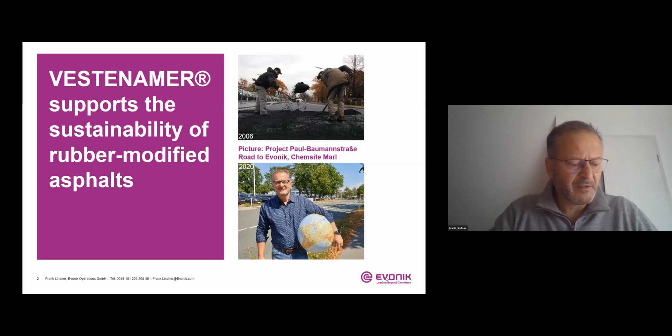Today, I would like to give you, first of all, a quick introduction into our targets. Then we'll come to our results of our lifetime prediction, our emission tests, as well as presenting a chance for CO2 reduction in road construction.

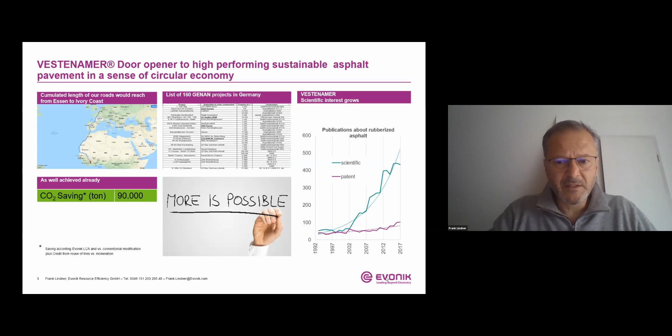Let's start with a quick overview about what is VESTENAMER in road construction. First of all, we are talking about a global business, but only in Germany alone we have already 160 projects in a list. We can do a calculation of already achieved CO2 savings as we have finished our life cycle assessment in 2020. And what we are very proud about as well is we see a growing scientific interest into our product and the solution of rubberized asphalt containing VESTENAMER.

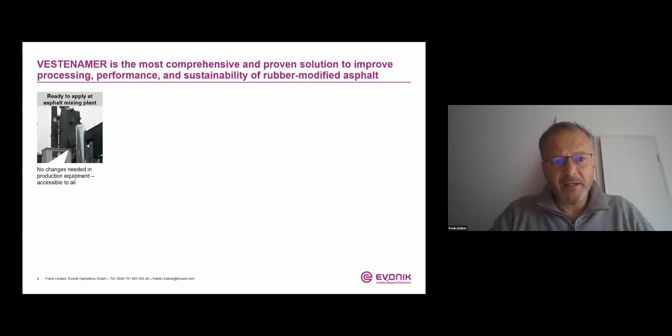We call VESTENAMER a most comprehensive and proven solution to improve processing performance and sustainability of rubber modified asphalt, which I would like to explain by some key aspects we are serving. First of all, our solution is ready to apply at any asphalt mixing plant with no changes in the equipment needed. You will observe that there's a very clean handling of rubberized asphalt possible when VESTENAMER is added. We serve also easier processing as our product is reducing the stickiness to metal, which is then giving you an easy manual handling of the material.

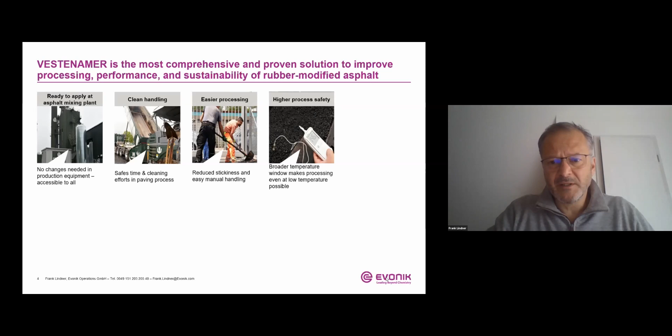There is a high process safety coming with the use of rubberized asphalt containing our product because the broader temperature window allows you even processing at lower temperature. We have observed in the field that 110 degrees centigrade is no problem in working with the material. And all this results in a very nice and easy way to have secure compaction and therefore best performance of your road pavements.

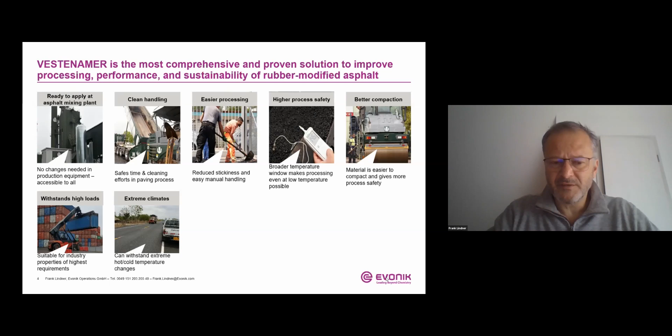Finally, our solution is ready for any of the asphalt pavements, even to the very extreme challenges of industry properties. For example, like this container property, as you can see on the picture. Climate is no issue for rubberized asphalt containing VESTENAMER. If it's really cold or if it's extremely hot, our asphalt solution can serve all the climates.

We're monitoring our projects. Some of them are now 16 years old. We can see that still nice performance is there. More about long-term or lifetime prediction would come at the end of the presentation.

So let's speak about another aspect, and that is a sustainable approach by the use of secondary raw materials. Together with our product, it's possible to enhance the use of recycling asphalt, and I will give you a slide at the end of the presentation as well, as there is the sustainable resource, the secondary resources itself, which gives you a very nice sustainable approach of asphalt paving in a sense of a circular economy.

And not to forget CO2 savings. We see a lot of potential in CO2 savings, which is available for the road construction industry, and I will give you some details later on.

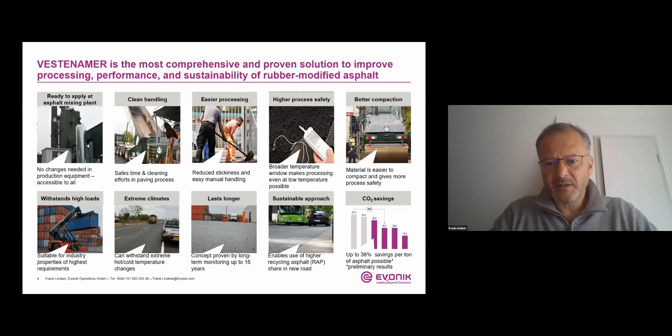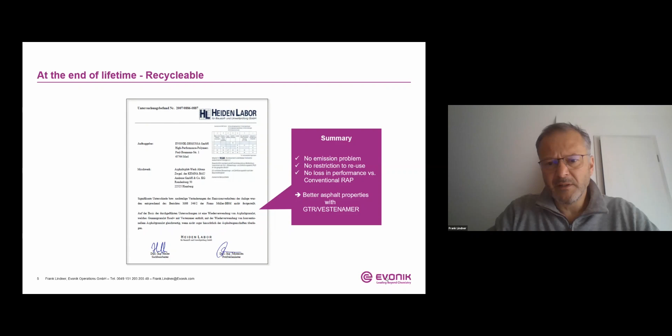Not to forget what happens at the end of a lifetime. So every pavement comes to a lifetime anytime. We tested that, and we can say that if we talk about the asphalt properties, or if we talk about the emissions while we would recycle rubberized asphalt with our product, there is no issue. There is no restriction in reusing the material.

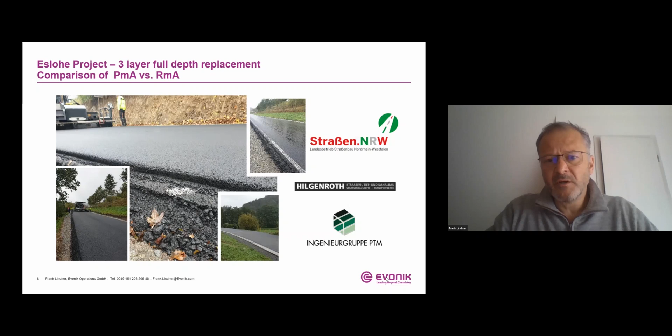What I would like to tell you, or what I would like to explain to you today as well, is about a project which we ran last year in October in association with our State Department of Transportation in our state in Germany. And that was about a full replacement of an asphalt package. All 3 layers had been replaced.

All material which we are testing are coming really from that commercial production. And most of the testings are based on the splitting tensile strength tests and the cooling test. And the cooling test I would like to present a little bit in detail.

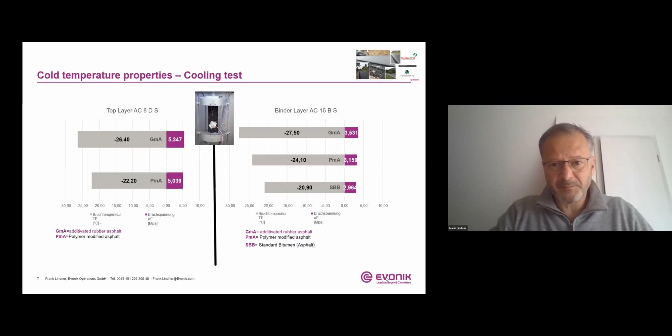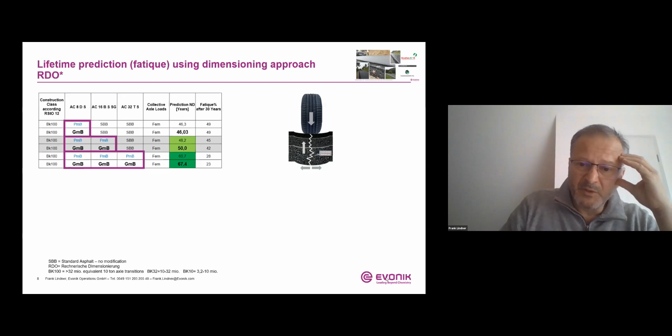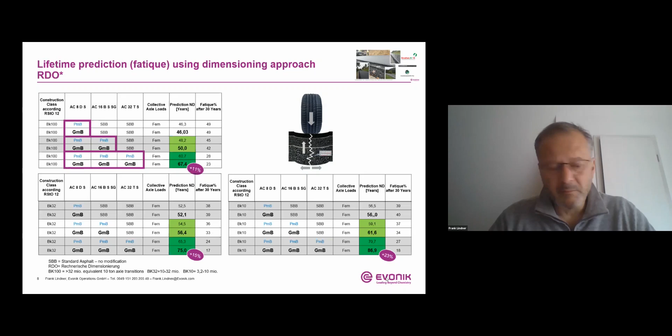The splitting tensile strength test, which is the base of this study, has been done at different frequencies and different temperatures. Because we have done that, we can do this prediction for all the different construction classes which we have in Germany. You can see the lower the construction class is, the higher the impact of rubber modification can be observed. Up to 23% extra lifetime compared to the state-of-the-art solution available today can be achieved if you go for something like a middle-class construction.

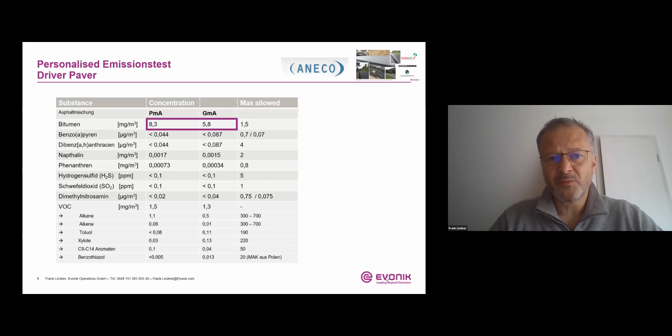There's one interesting thing: the emission coming from bitumen itself. We have seen a lower emission on the rubber side - something that is not good enough to achieve the 1.5 milligrams per cubic meter, which is the allowed max value starting 2025 in Germany. So again, we have an advantage on our side, and we are now studying how to lower the production temperature to further improve the emissions in asphalt.

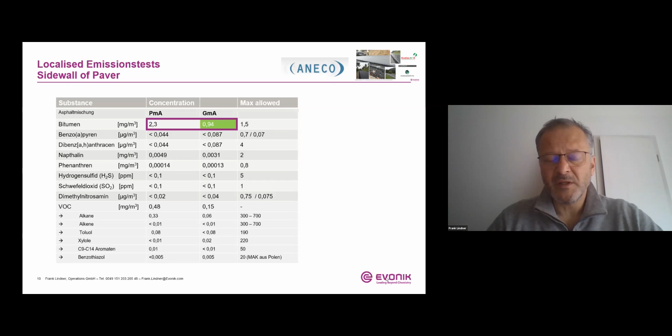We did also test at the sidewall of the paver, and here the same picture: there is no critical substance. The advantage, as we see it from our studies, is on the side of the rubberized asphalt, but here we can also see that we have reached a level under the new max allowed value of 1.5 milligrams per cubic meter. We know that this is the first test, and we have to go further and deeper into that subject, something we are already planning - including emission tests at lower production temperatures.

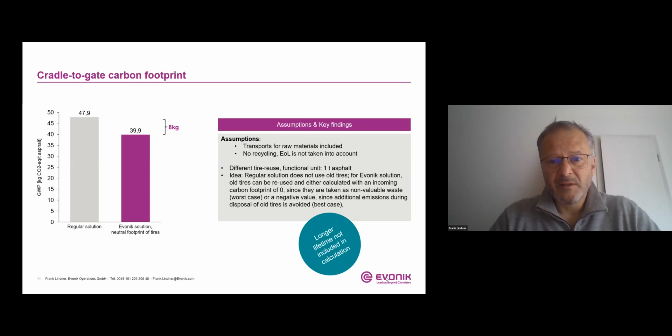And these advantages are not including the longer lifetime. So it's simply finishing the production and then seeing the CO2 saving. This is the asphalt production, but we can go a step further.

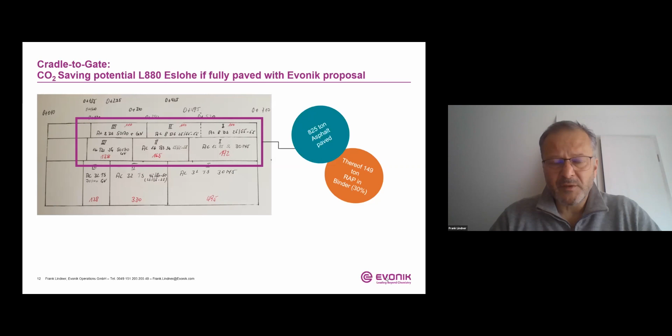Let's make a calculation based on the small project which we used for the testing. This is the setup, and in total for the top layer and binder layer, 825 tons of asphalt have been produced and paved. There was 30% recycling asphalt in the binder layer, which we have to extract from the calculation. So pure asphalt was roughly 676 tons.

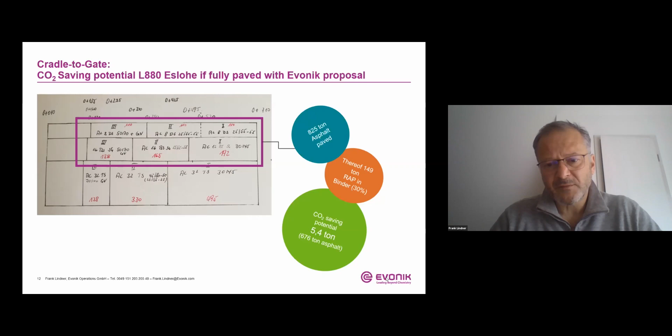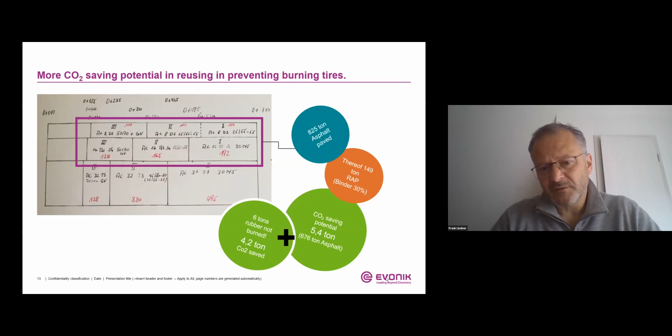From the cradle to gate approach, that means simply from production of asphalt, we already achieved 5.4 tons of CO2 saving. But 6 tons of rubber had been used in this project. And by not burning the rubber, but using it as a recycling material, another 4.2 tons of CO2 saving is possible and has been achieved.

And what would that mean for Europe? First of all, we can see that there is an impact from using rubber, and that is coming from not burning. Not burning the tires is saving 700 kilograms of CO2 for every 1 ton of tire which is going into recycling.

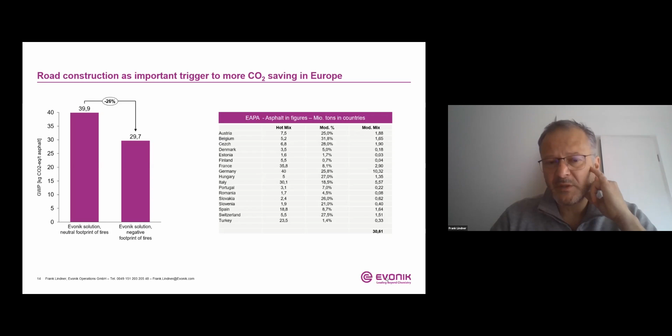We then see the asphalt figures, as we can see on the upper side. We know how much modified asphalt is produced in Europe in the countries which are listed. And if we take this as a basis, then roughly 290,000 tons of CO2 savings is possible if we would think about fully replacing the existing solution and turning it into using secondary raw materials. That means we would not burn the tires, but we would reuse them in asphalt. That brings us the first 290,000 tons of CO2 savings.

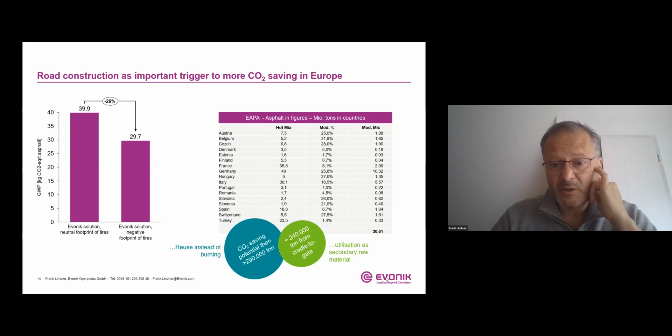Plus, the cradle-to-gate approach, as we have seen before, would add another 240,000 tons of CO2 savings.

I would like to highlight one last thing in this presentation, and that is the recycling of asphalt. We do know that there are some limits, especially if we talk about top layers, and we sometimes hear 10 to maybe 12% of recycling asphalt may go into the top layer.

But we are monitoring a project which we finished in 2012, and the order from the authorities was to use the maximum possible amount of the old pavement going into the new pavement for the new construction. What we have done is a top layer containing 50% recycling asphalt.

However, what we have achieved is a high-performing asphalt pavement, and we have tested asphalt properties to prove that. Plus, we have reduction in supply chain logistics because we have saved 50% of raw materials, which have not been necessary to bring to the asphalt plant, as it was already there from the recycling and the old asphalt pavement.